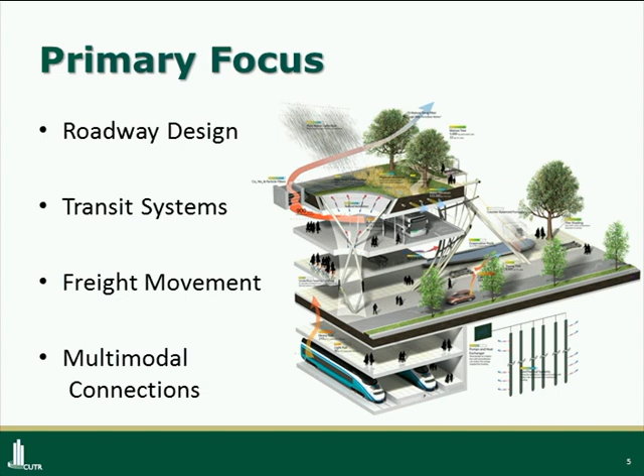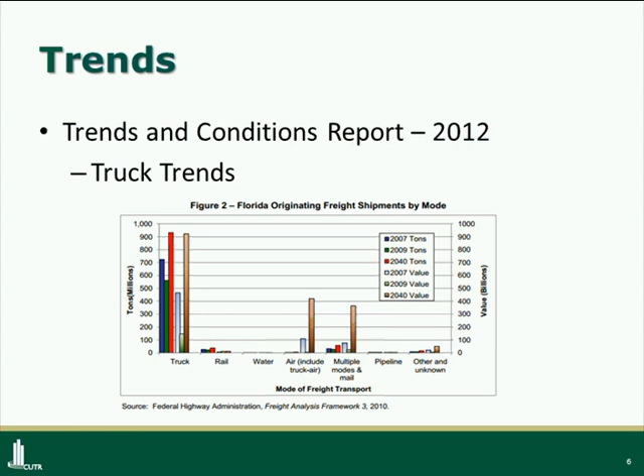Another trend that we considered was the millennial and mobility trends. This trend supports the point that young people are more open to using developing technology. Also, these same young people are more willing to use public transit as opposed to their own personal vehicles. Since these young people will be the majority in the year 2060, or at least one of the top contenders for a generation, it was important to keep them in mind when developing these concepts.

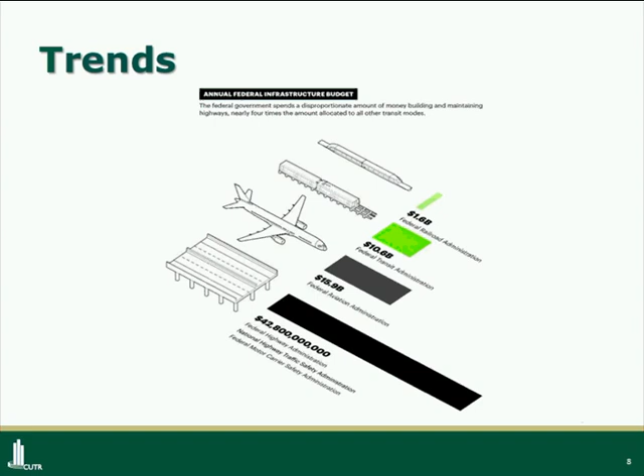To the innovative strategies, we really wanted to include several in our ideas for our vision for 2060. It was important to consider technological advances that will be heavily used in the future. Some of those advances include smart, connected, and autonomous vehicles that will be predominant in the future. I believe IEEE said 75% of vehicles will be autonomous by the year 2040.

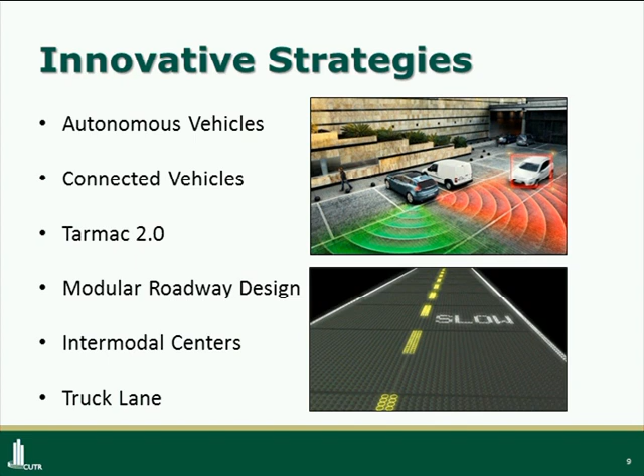Another developing technology we considered was the solar roadway, known as the Tarmac 2.0. We also wanted to implement modular sections that can be placed into the roadway. Another concept was to create easily accessible multimodal centers that will act as a hub to various transportation modes. And finally, we looked at managed lanes, really focusing on a truck lane in particular.

Due to truck trends that I informed you of earlier, we felt it was important to add a truck lane along I-4. This truck lane will really create an ease of flow for trucks, and they will be able to move more freely and get to their destination more quickly, allowing for a more efficient truck movement system. This will help to boost the local economy as well.

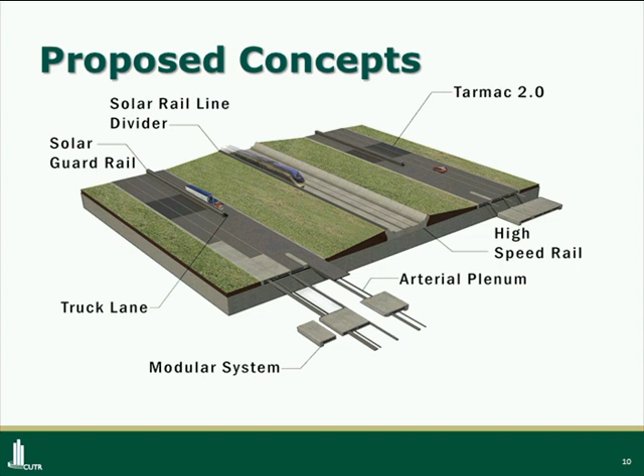You may have noticed the barrier that separated the truck lane from the general use lanes in that previous image. This barrier will be equipped with solar panels throughout their span, just like with the Tarmac 2.0. These solar panels will be able to harvest solar energy that can be used for any of the needs necessary.

With the implementation of modular sections, seen here, you can see that there's now a plenum space underneath where you can put cables or any utility wires that are necessary now or in the future.

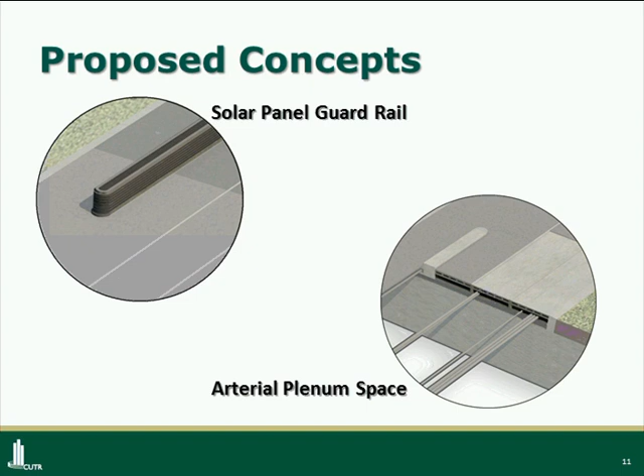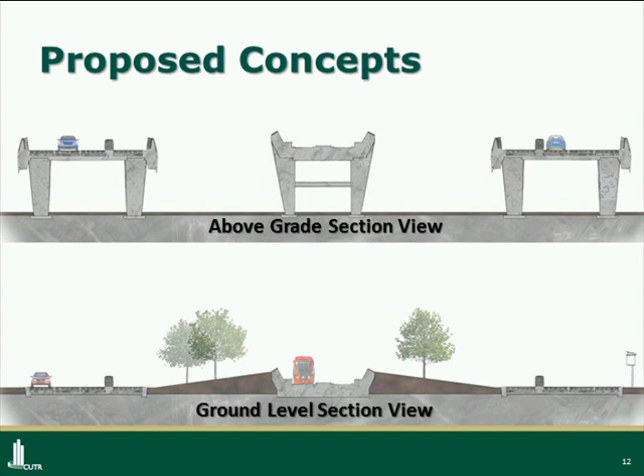The elevated view of the rail shows how it can exit I-4 to reach its destination, the multimodal centers. This rail will act as a connector between three cities, each with a multimodal center: Tampa, Lakeland, and Orlando.

Each station will vary, but all are accommodating and easily accessible by anyone. These multimodal stations were important to add because of recent success in other cities, including a multimodal center in North Carolina that had a heavy increase in revenue for surrounding areas. The use of these stations would really benefit the economy in this region.

Just to briefly mention freight movement once more, we are going to make sure that the Freight Logistics Center in Winter Haven will be able to easily access the truck-only lane on I-4, making it easier for those trucks to quickly reach their destinations.

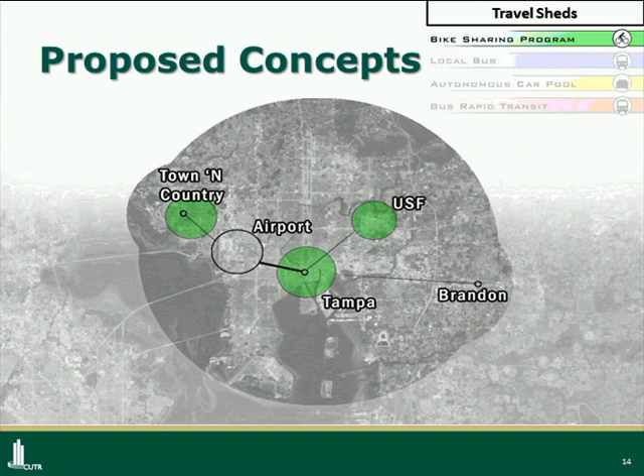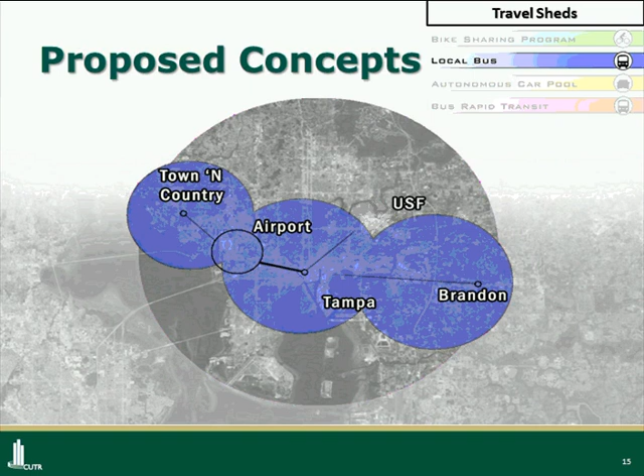We also wanted to keep the existing local bus system in each city, but perhaps increase the amount of routes to give people more options when it comes to using that local bus system.

We also wanted to implement an autonomous carpooling option. This will allow people arriving at the multimodal center in Tampa to use an autonomous car to travel with others to similar areas nearby. This could be really beneficial to anyone commuting to Tampa for work, allowing them to carpool with coworkers and not worry about driving into the city.

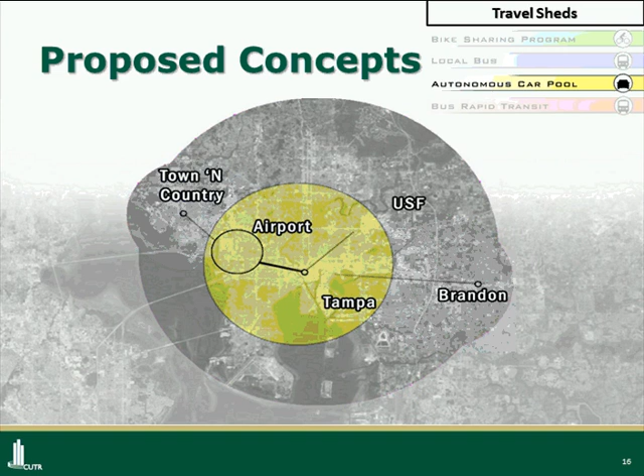It was important to keep the existing BRT system as well, extending throughout each city, once again giving people more options when it comes to using that BRT system, and diverting people away from using their personal vehicles.

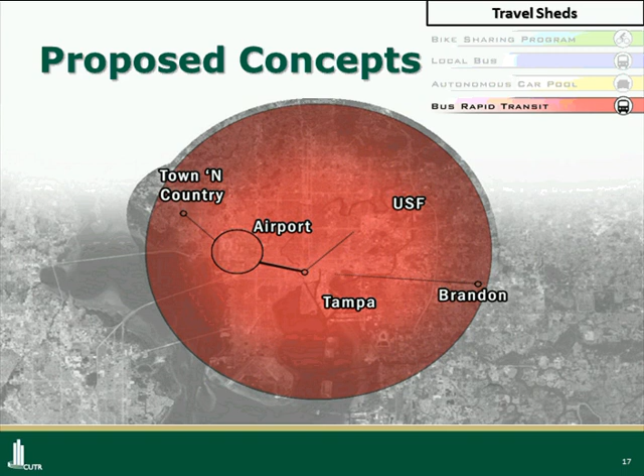And here are the travel sheds of each of those modes just discussed, new and old, in Tampa.

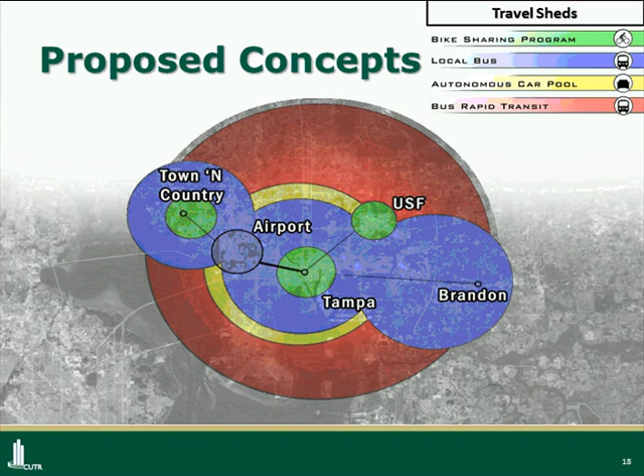Orlando is very similar to Tampa in that we amplified the same existing modes and added the autonomous carpooling option and bike sharing program. Lakeland is much more rural than Tampa and Orlando, so we determined it wasn't necessary to implement bike sharing or autonomous carpooling at this time. However, these can easily be implemented in the future if the demand is there.

With all these modes of transportation available in each city, people will be more drawn to using these modes rather than their personal vehicles. This increase in connectivity with new and existing modes will result in a healthier and greener environment, which is beneficial to everyone in the region.

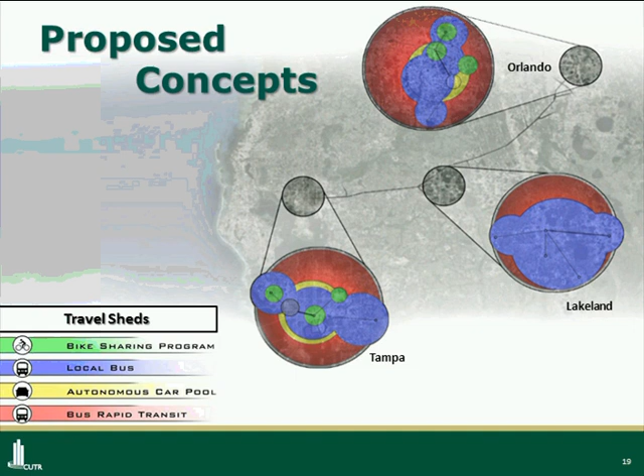So our vision of 2060 is one that shows a corridor that is accommodating, environmentally friendly, easily accessible to anyone that needs to use it, and can be easily expanded throughout the entire state of Florida, leading to an economic boost. With the implementation of these concepts that I've spoken with you about today, we believe this is the corridor of our future. And now I'll pass it to Danny from Team B.

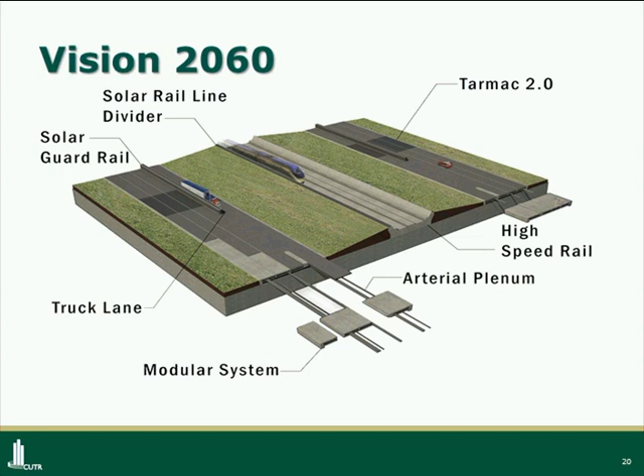Thank you, Casey. Again, my name is Danny Shupp. I'm here to represent Team B, which consisted of myself, Patrick Buddenbrock, Noor Amores, and Jessica Dahamata.

I'm going to go through our vision, moving on to some innovative strategies and technologies we used in these corridors. I'll then introduce the rural, suburban, and urban future corridors we designed. Following that, I'll discuss managed lanes and some more ideas, concluding with additional ideas for 2060 and beyond.

Our vision was to develop an environmentally conscious multimodal design for future rural, suburban, and urban corridors that could be applied throughout the state either as new construction or as a retrofit.

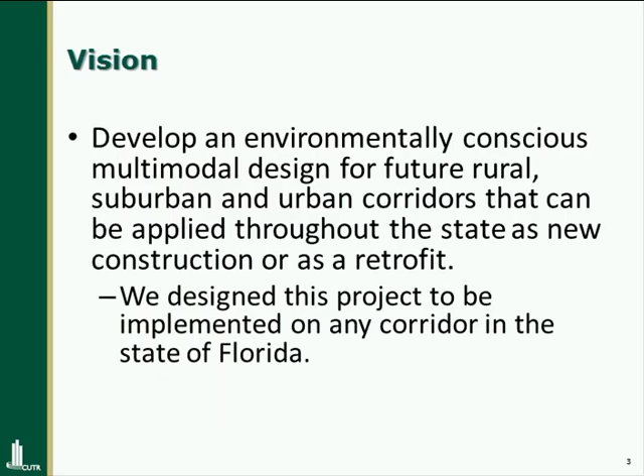We were really focused on trying to develop these designs so that they could be implemented on any of Florida's corridors, either the current ones or the ones we develop here in the future. One of the major concepts we wanted to focus on were complete streets, a huge trend these days. Essentially, a complete street is a roadway designed to accommodate all users.

Another concept we really wanted to focus on was the redesign of intersections, mostly to promote safety for bicycle users. Typically, a bicycle will wait here on the left side of a vehicle in a right-turning situation, whereas the Dutch have redesigned their intersections to keep bicyclists to the right of vehicles at all times. This promotes a safer experience for bicyclists.

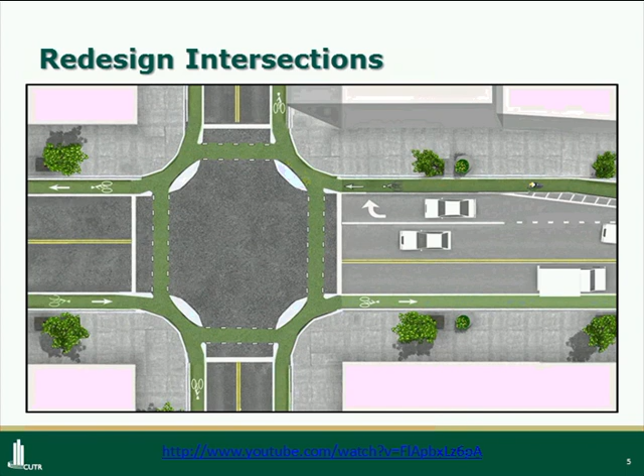They don't have to worry about weaving in and out of traffic, especially at this major point of conflict when a car is trying to turn right and a bicycle is trying to continue straight. You'll also notice there are some curbs here to promote bicycle safety as cars and bicycles are turning at the same time. And believe it or not, these intersections are actually not any wider than a typical intersection we design today.

Rain gardens are another concept we wanted to really focus on in these corridors. These can be really great tools for collecting stormwater runoff, reducing the amount of flooding that can occur. Here in Tampa, we all know that Fowler especially is really bad about flooding. Bayshore is another good example.

Looking at these pictures, rain gardens don't have to be ugly. They don't have to be ditches in the road. We can actually put some really nice plants in here and complement them with the right kinds of soils. They can filter out some of the nutrients that are in this runoff. To take it one step further, we even considered implementing cisterns below the ground that could collect this filtered water so that it can be reused for irrigation.

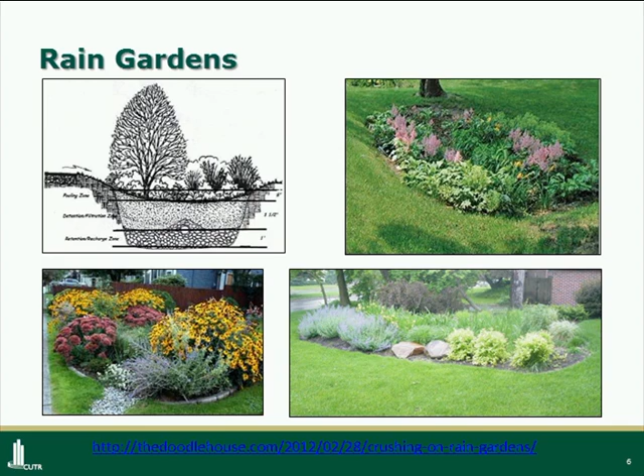Some of the technologies we wanted to include are listed here. We've tried to include as many as we could in the designs. One that I wanted to point out specifically is the piezoelectric lanes. These are roadway lanes that have special generators below the surface that actually collect energy through the vibration of vehicles on the road, and that energy can be stored and implemented in a variety of different ways that I'll discuss in just a second.

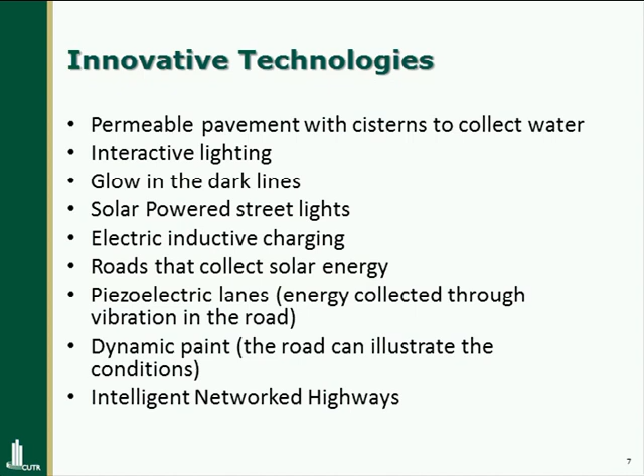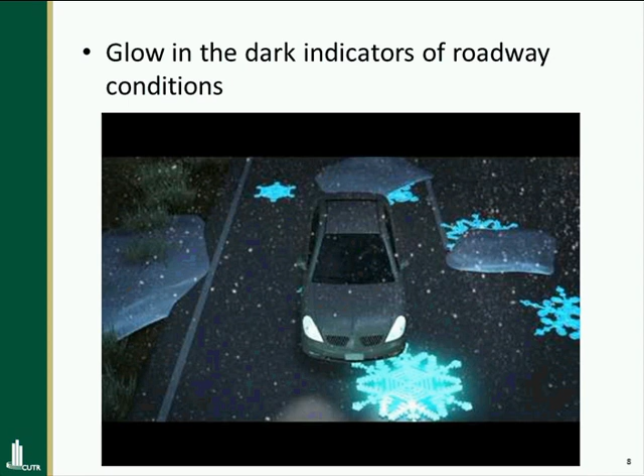Another one of the technologies we used were indicators on the roadways. These indicators actually glow in the dark, and they're activated in certain weather conditions, such as ice on the roads or cold roadways. They'll come up like this. Wet roadways will come up a little differently, just to really improve safety and make drivers more aware of what their surroundings are like.

Interactive roadway lighting is something that we also wanted to include. This is very similar to the Tarmac 2.0 that Casey just discussed. This roadway can actually allow users to know what is happening on their road. Is there something on the road? Is there an accident? Is there an animal? It can also let them know speed limits.

We wanted to include with this type of interactive roadway lighting, street lights that are also interactive. When there are no vehicles present, the street lights wouldn't need to be on. It saves energy. As the vehicles approach, the street lights turn on, and as the vehicle passes, the street lights turn back off. We suggested using piezoelectric generators or solar panels on the street lights to supplement the energy required to use these surfaces.

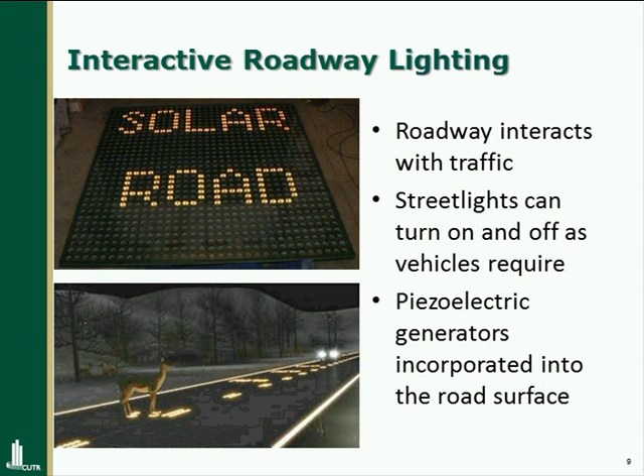Inductive charging is another strategy we really loved. We wanted to put inductive charging plates below the surfaces of the road, and as electric vehicles drove over them, they could be charged without stopping to plug in at any kind of station.

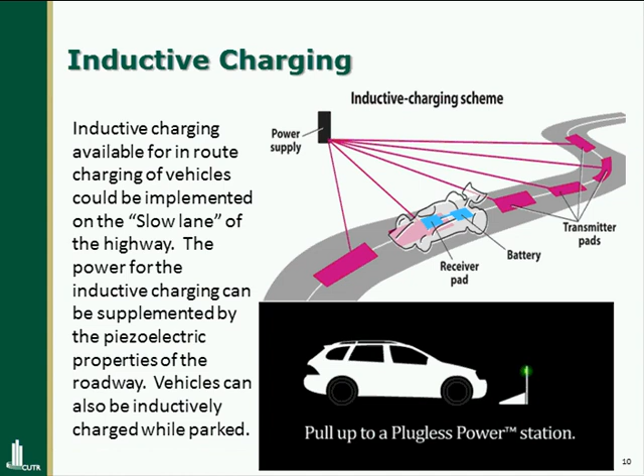This is one of those exciting case studies. Gumi, South Korea has been using an electric bus system. One of their bus routes is actually charged using these inductive charging plates. The plates are under about 5 to 15% of the total route, and they're off until one of the electric buses passes over it, where they then charge the bus throughout its route.

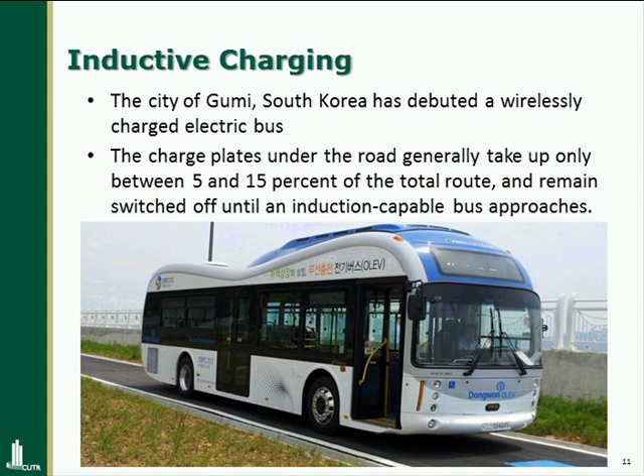And it reduces the amount of batteries required to be carried by these buses. Again, just a very nice, environmentally conscious, environmentally friendly solution that we've included here.

To point out some of the benefits of using these technologies and strategies, we suggested that additional revenue can be generated to offset the cost of constructing the highways with this new advanced technology. An example of that would be users paying a fee to use the inductive charging.

We thought that the inductive charging lanes could be segregated from the highway, and you would need to use an electronic tolling mechanism such as SunPass. You would drive off into the inductive charging lane, drive however many miles necessary, your car would then be charged, and you can exit back onto the regular flow of traffic.

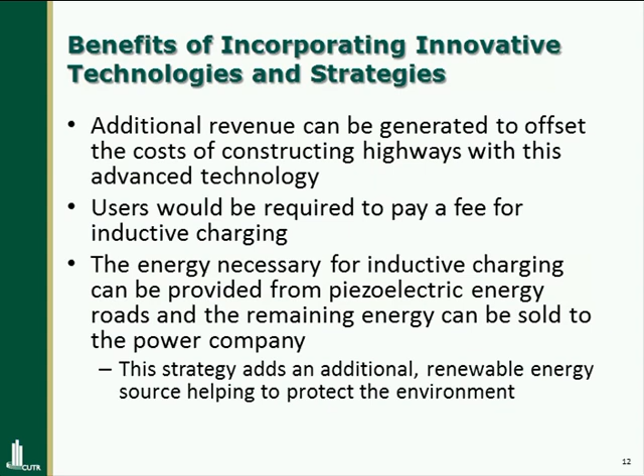The energy necessary for this inductive charging could actually be provided from the piezoelectric generators that are in the road, and any remaining energy could be sold back to the power company. It's an addition of a renewable energy source, really helping to protect the environment, which is something we were very focused on with this project.

Moving on to the suburban concept, you'll notice that same rail system is integrated into the suburban concept, where the people that are actually eating the food can have access to it.

We really wanted to focus on complete streets in these types of areas, a lot of pedestrian and bicycle accommodations. We really wanted to move away from that suburban, sprawling feel, and include some infill housing and infill development with parks and open spaces. And again, you'll see the rain gardens that are included in this corridor as well.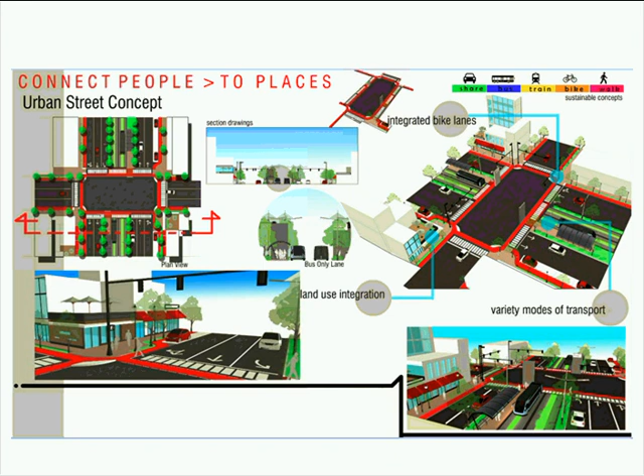We included transit-only lanes in this to help make transit a more favorable option, and really try to give a variety of modes in these situations. We also wanted to promote land use integration to really support a vibrant, walkable urban street concept.

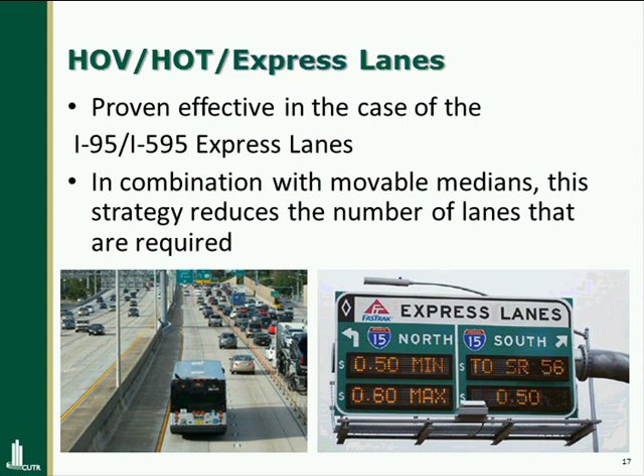I think I-95 and I-595 have really proven to us how effective express lanes can be here in the state of Florida, and we decided, in combination with some movable medians or zipper barriers, this could be a very innovative strategy to use in future corridors.

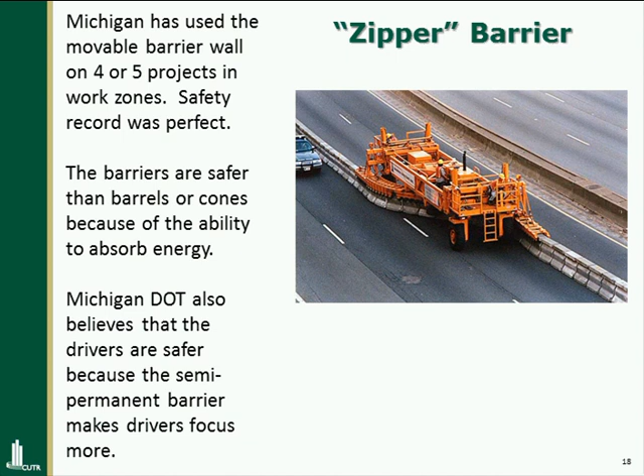The zipper barrier is something that Michigan has been using in other places recently across the U.S. for work zones. They'll use this machine that moves the barriers for work zones, and then it replaces them at the end of the working period. These have been done with a perfect safety record, and are actually suggested to be safer than barrels or cones because of the ability to absorb the energy. People also tend to focus more when there's a more permanent barrier in place like that.

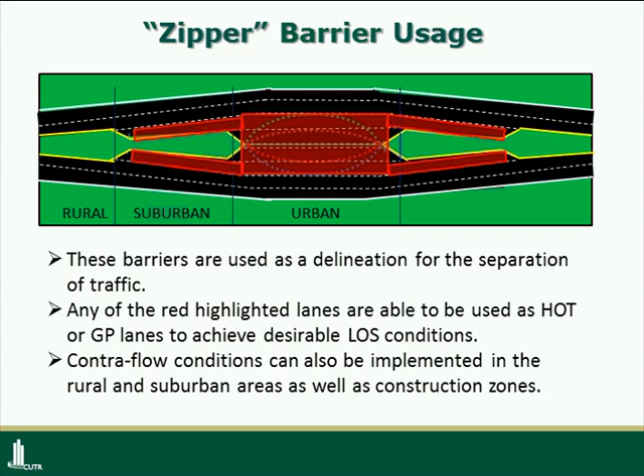This is an illustration of how we may use these barriers. They could be used to delineate the separation of traffic, and you'll notice any of these spaces highlighted in red could be used as HOT lanes or general purpose lanes, depending on the level of service and the peak times of day that we're experiencing.

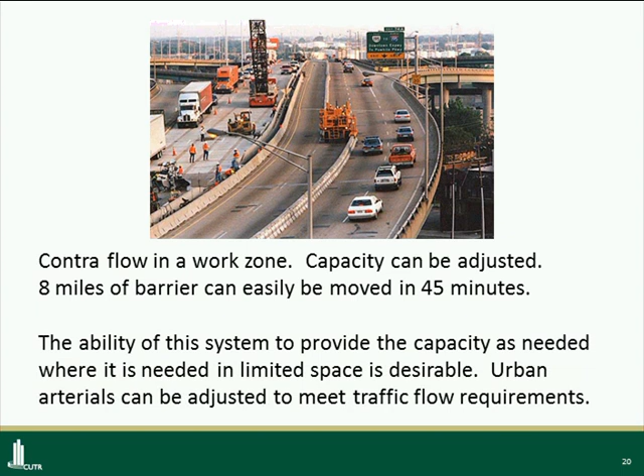Contraflow situations in work zones are another place where these barriers are used. It's noted that about 8 miles of barrier can easily be moved in about 45 minutes, making this a very feasible concept for increasing or decreasing the amount of capacity on one side or another of the road.

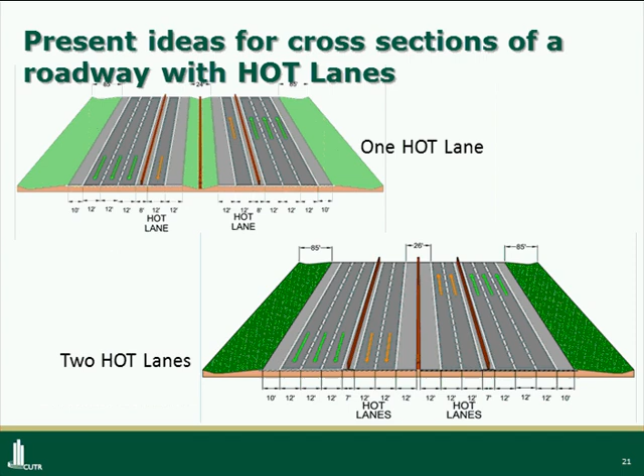Traditionally, we've been dealing with HOT lanes in this type of situation. We'll have 3 general purpose lanes and 1 HOT lane, or 3 general purpose and 2 HOT lanes, which really requires quite a bit of capacity. We've decided with movable barriers we can actually reduce the amount of capacity and get the same effect.

In one situation, the use of the zipper barrier could provide 3 northbound lanes and 2 southbound lanes, and very quickly be changed so that it's 2 northbound and 3 southbound, depending on the time of day and the level of service required. And then these can be converted into HOT and HOV lanes with the addition of more movable barriers.

It would be strange to talk about a future transportation without talking about vehicle-to-vehicle or vehicle-to-infrastructure connected vehicles and automated vehicles. It is clear that this is a trend we're moving towards, and we really wanted to focus on and address these as we move on towards 2060 and beyond.

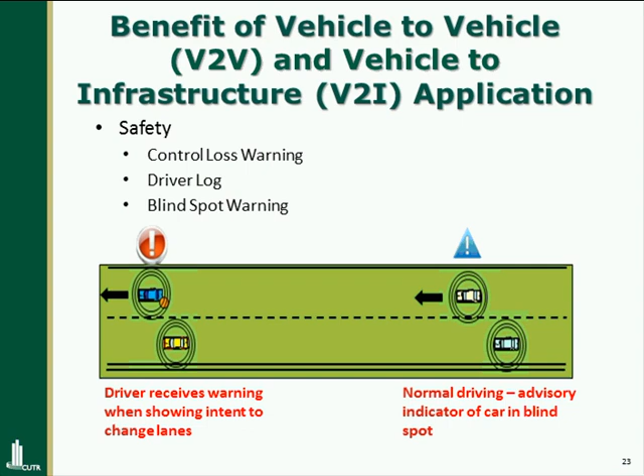The safety of these was what we really liked. The ability of your vehicle to understand its surroundings and possibly even act on those surroundings before you even know what's going on is excellent. We really wanted to try to include some of these concepts.

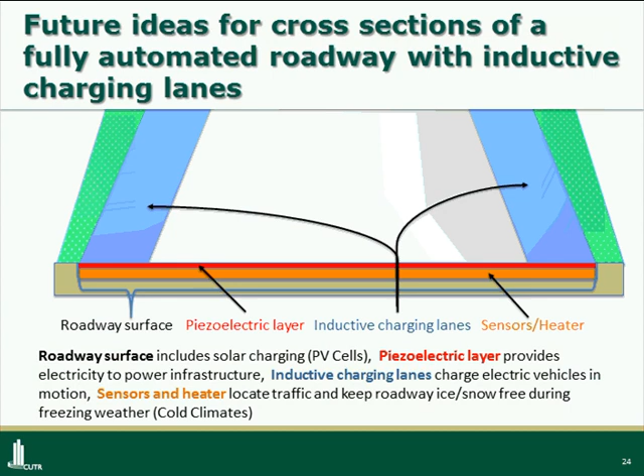So in doing that, we outlined a corridor that would have a roadway surface, and below that a piezoelectric generator. That generator would then be used to power the inductive charging lanes we discussed before. And getting out of the state of Florida a little bit, we wanted to possibly include heaters below the roadway. In situations where there's icy road conditions, we can just use the heaters to clear the roadways, making a much safer situation, mostly for colder climates.

Incorporating automated vehicles, you'll notice that in this design there are no lanes and no road delineation. We've decided that in 2060 and beyond, it's possible for vehicles to communicate with each other and with the infrastructure to get a really good idea of how to align themselves, so that the optimum level of service and optimum speeds can be achieved. The flow of traffic will be very close together, and it'll happen at much higher speeds.

Those are some of our ideas, and with that, I'd like to pass it along to Nikhil for him to present Team C's ideas.

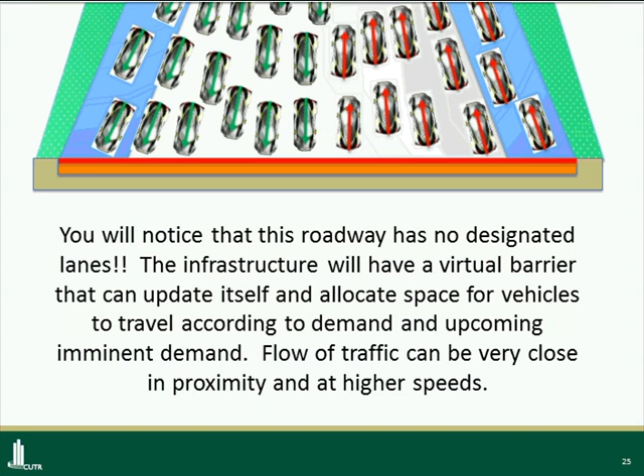Hi, my name is Nikhil, and I will be presenting the ideas we have been developing as part of Team C. Team C, consisting of Josh McDonald, myself, and Eric Pullman, has been working on the Future Corridors project since September, and we would like to go into our design.

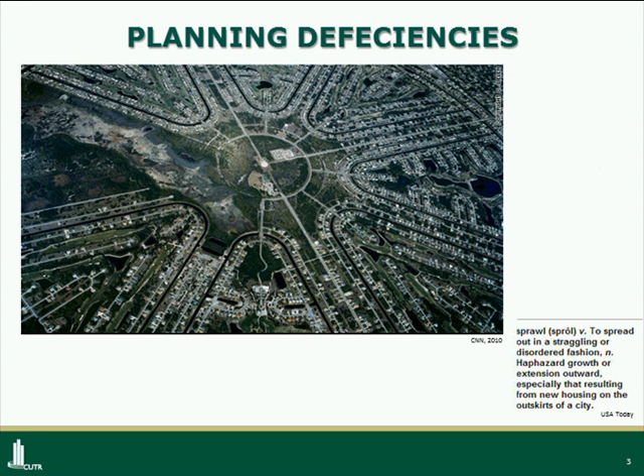But before we go into our design, I would like to focus on the aspect of urban sprawl. This is a photograph taken by a renowned urban photographer and enthusiast named Christoph Gielen. This is coastal Florida, and he's trying to show the effect of sprawl that is virtually unseen for most of us, because these are all aerial photographs taken from a particular height.

Something I want to draw your attention to is the deficiency of planning. As you can see, this area has 2 houses which share a boundary wall, and the time taken to drive between those 2 houses is 20 minutes and 9.3 miles.

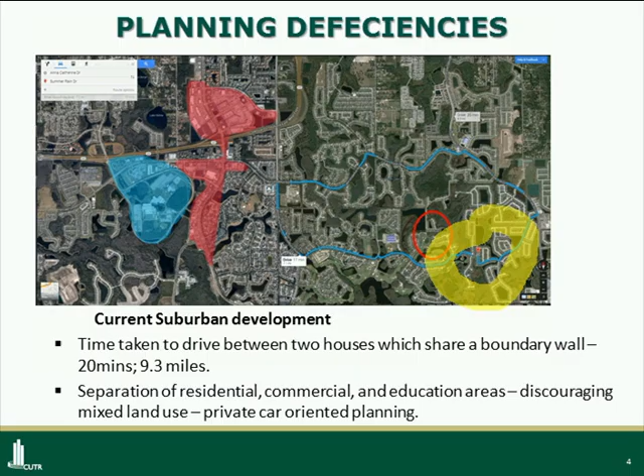This is again in the state of Florida, where we've seen this trend of separating residential, commercial, and educational areas, which discourages mixed land use and makes the private car more of a prosthetic device than an independent choice of the user. This is something we would like to address in our corridors when we present our vision.

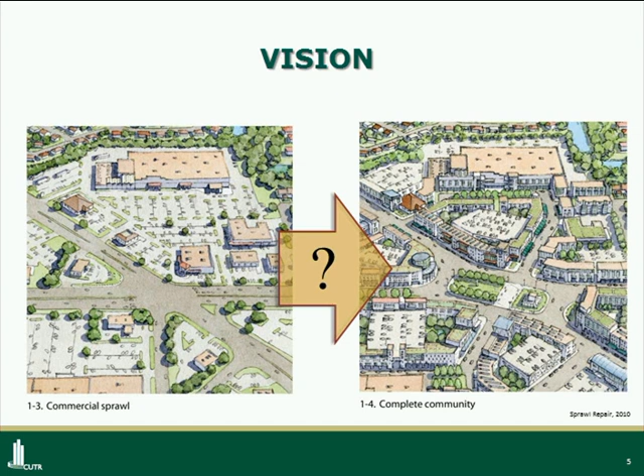So our vision primarily involves changing from this element of commercial sprawl into building more complete communities, and the presentation will go on to explain how we go about doing this.

So we start by proposing modal alternatives to the future corridor. We believe that people should have a duality in mode choices, with different modes of transportation for the seamless movement of people.

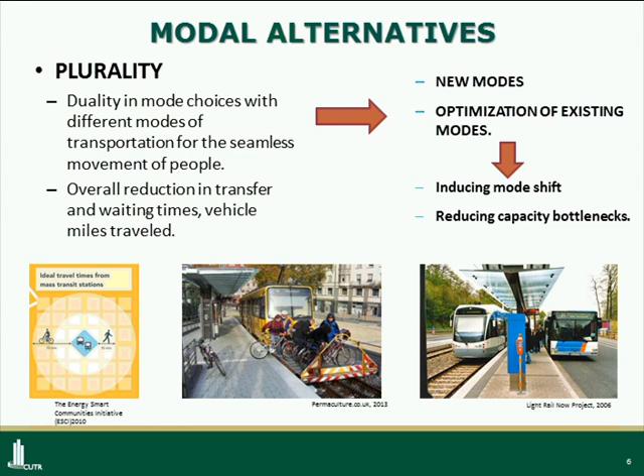We believe that we need an overall reduction in transfer and waiting times and also in the vehicle miles traveled. How do we achieve this? We achieve this by two points: one, by having new modes, and second, by optimizing the existing modes that we have. This is aimed at inducing mode shift, and it's also aimed at reducing capacity bottlenecks.

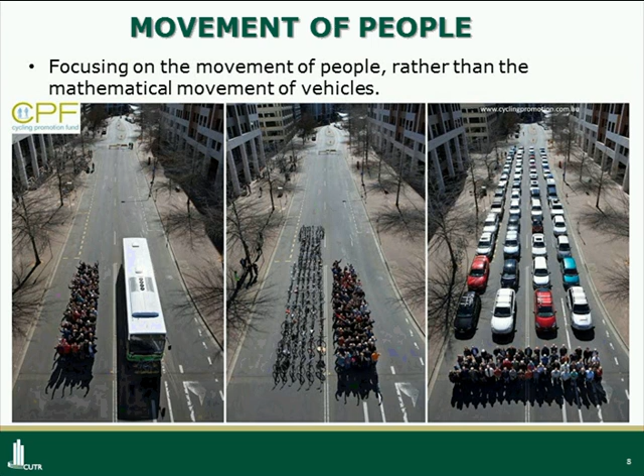The second thing that we want to focus on here is the movement of people. We believe that we have to respect the autonomy of the individual, but then we have to also ensure that we ease the flow of the masses. So again, coming to the same point where I focus on the movement of people rather than the mathematical movement of vehicles. The picture below is very self-explanatory on what mass movement can do to a roadway condition that you see in this photograph.

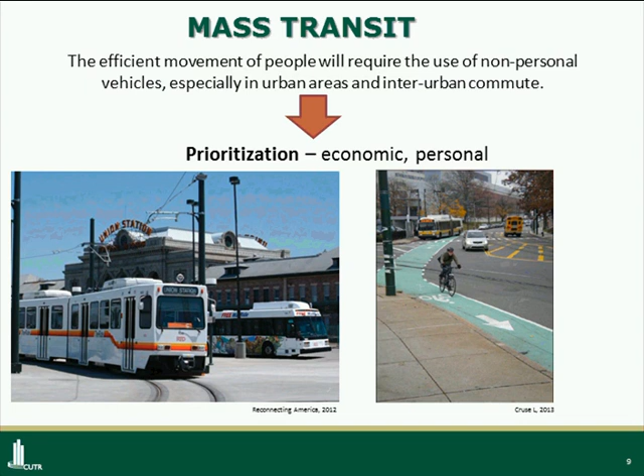Next, the focus that we want to do on the future corridor is on mass transit. For the efficient movement of people will require the use of non-personal vehicles, especially in urban areas and for inter-urban commute. This has to be seen as an economic and personal priority in the days to come, because we have been witnessing a lot of increasing trends in car ownership for the urban areas, and we feel that it will come to a stage where we are going to have to think about these measures. So the next section that I'm going to emphasize is on the innovations that we propose to do, starting with the aspect of new modes.

The first mode that we propose to introduce is an express train service along the interstate corridors for the state of Florida: passenger rail transport operating between the extents of the future transportation corridor. An operating speed range could range between 40 to 80 miles per hour.

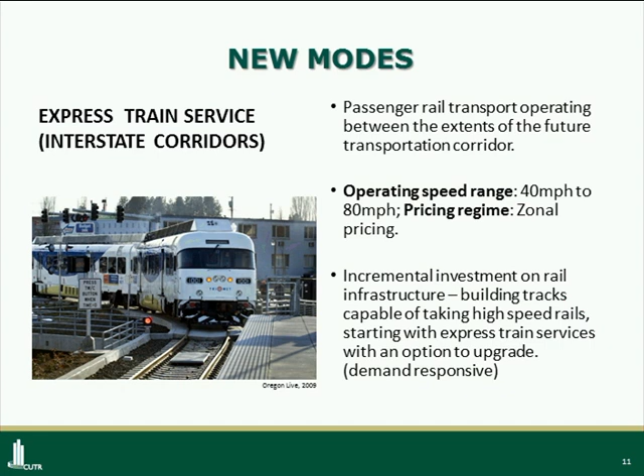We believe that we need to do something called an incremental investment on rail infrastructure, which basically means that we build tracks which are capable of taking high-speed rails, but we start with express train services with the option of doing an upgrade based on demand, so that we don't waste a lot of money by investing in high speed just before we see the demand. So that is more of an incremental investment on infrastructure.

The second mode that I propose here is the bus rapid transit system, which we intend to apply along the state highway corridors. The bus rapid transit systems will operate as the connectors between the suburban and the urban, and also along the internal urban routes.

We are proposing an operating speed of 35 to 45 miles per hour, and zonal pricing. Here we are doing an immediate investment in fleet with minimal investment on infrastructure, because most of the infrastructure that a bus rapid transit system needs costs very little compared to the fleet that we are going to invest in. Bus rapid transits can operate on existing roads with updated stations serving population centers.

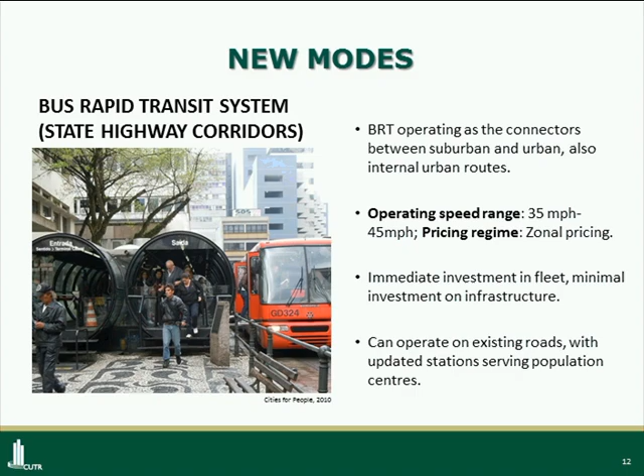Next, we come to the aspect of optimizing our existing modes, where we feel that planning for transportation has to be done in relation to the demand anticipated. That is, we envision a transportation system which is dynamic with respect to day, time and economic activity, and planning based on cultural events by extracting information from web sources and GPS data monitoring to study dynamism in demand.

We also propose an optimal scheduling based on the schedules of the new mode, whereby what we achieve is an integration of sorts, where we try to reduce the travel and transfer times.

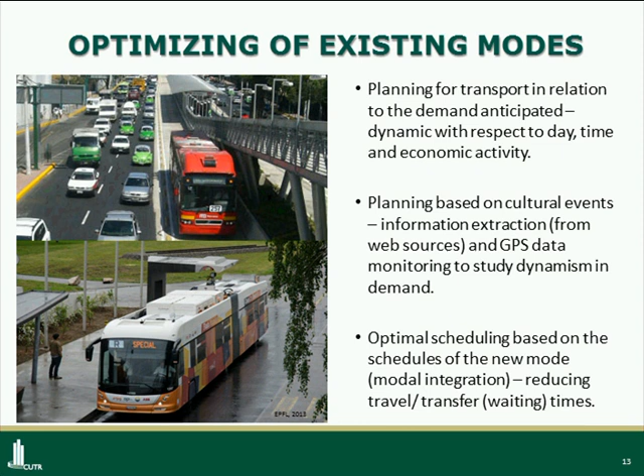So what are the key trends influencing this design? The major trend influencing this design is the fact that we are looking at an uncertain future. We are unable to exactly predict what is going to happen with how we move or how our mobility patterns are going to change. So we are looking at an uncertain future, and the planning will involve a very conservative approach at this point in time. We would like to quote the study done by the American Public Transportation Association, who have through their research found that fewer millennials look to cars for mobility.

If you can see below, you have the five modes. There was a survey conducted by the American Public Transportation Association, which asked the millennials to rate the five modes on a scale of five. As you can see, the bus system receives a 4.34 on a scale of 5, whereas the car receives the lowest at 2.24 on a scale of 5.

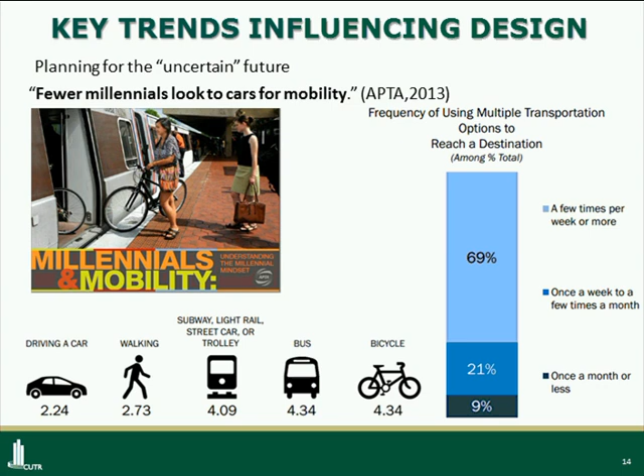Another key trend that has influenced our design is last mile connectivity, with lesser travel and transfer times. There were questions on the APTA report of 2013, which interviewed millennials asking what they would like to see in their transportation options, focusing on more reliability, real-time updates, user-friendly interfaces, Wi-Fi, 3G, and so on.

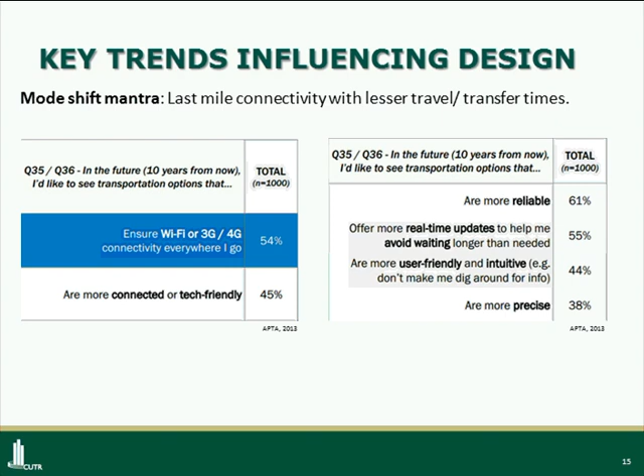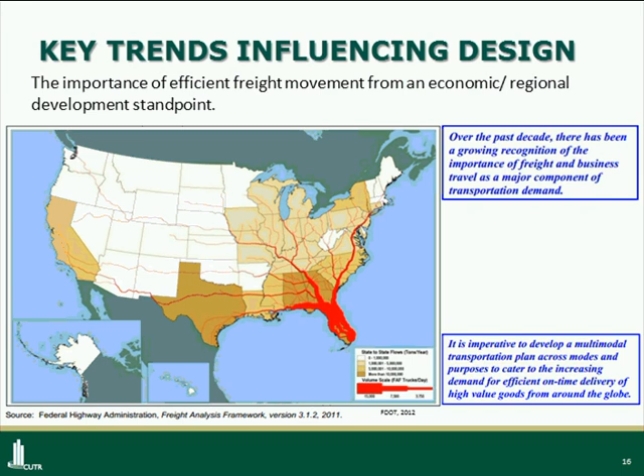Another major trend influencing our design is the importance of efficient freight movement from an economic and regional standpoint. This is the state of Florida, showing the freight flows occurring from Florida to the rest of the country, which have grown significantly. There's been a growing recognition of the importance of freight and business travel in transportation demand, and this will be one of the major trends influencing our design, which I'll discuss in the coming slides.

We are trying to shift from the predict-and-provide model to the predict-and-prevent model, where we try to accurately predict what is going to happen, even though forecasts are usually very difficult to make. What we are trying to do is reach a stage where we don't have to go back and do a lot of repair work on our investments.

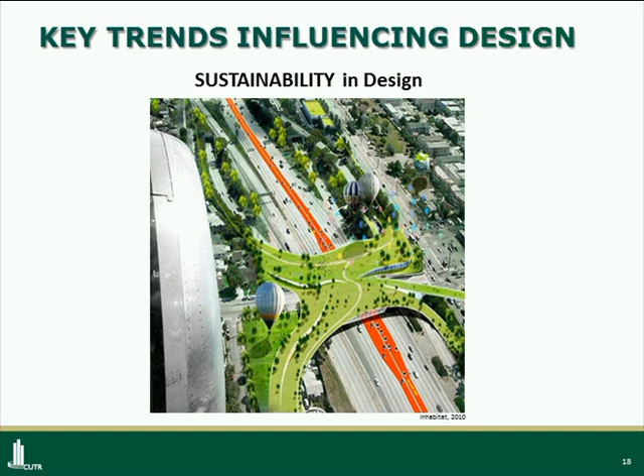Another key trend that influences design is sustainability, which has a lot of focus in the modern day. Now we come to the last part of the presentation, where I try to envision the future corridor that we are going to present before you.

For the proposed concepts, we have divided all the roads in the state of Florida into three broad categories: the first is urban arterial, the second is state highway suburban, and the third is interstate. As you can see, this is the current scenario in an urban arterial, a very typical one drawn from the state of Florida.

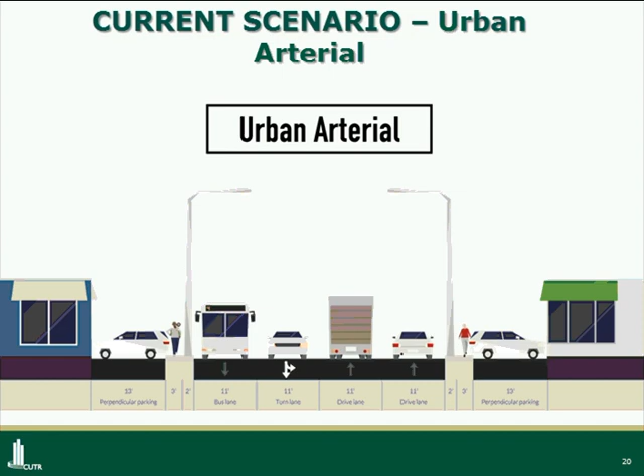These have been generated through Streetmix. As you can see, you have turn lanes, drive lanes, and perpendicular parking on either side. This is the current scenario for a typical urban arterial.

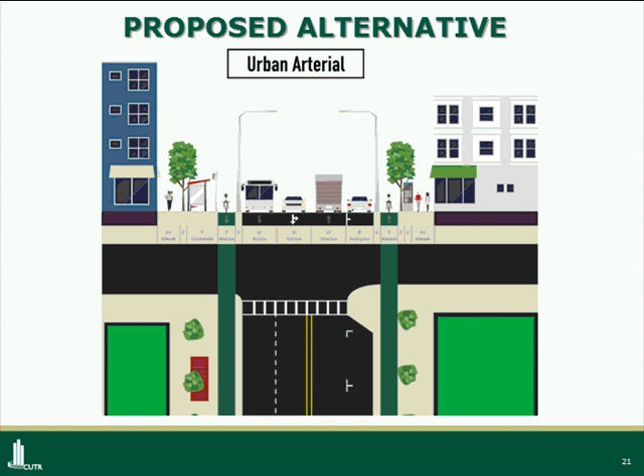This is a proposed alternative, shown in plan and section view, which I'll go into in more detail in this slide. We have taken off the perpendicular parking to the side streets, included a bike lane on either side, and proposed to reduce the number of lanes on the main road from 4 to 3.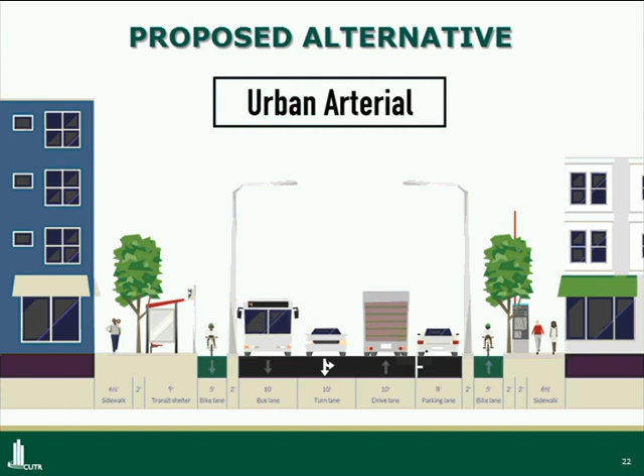In doing so, we intend to encourage a mode shift, expecting the number of people using private modes to decrease inside urban arterials.

Next, we show the differences from the current corridor conditions. This is a typical urban arterial where we're showing what differences would come along in our new design compared to the current design.

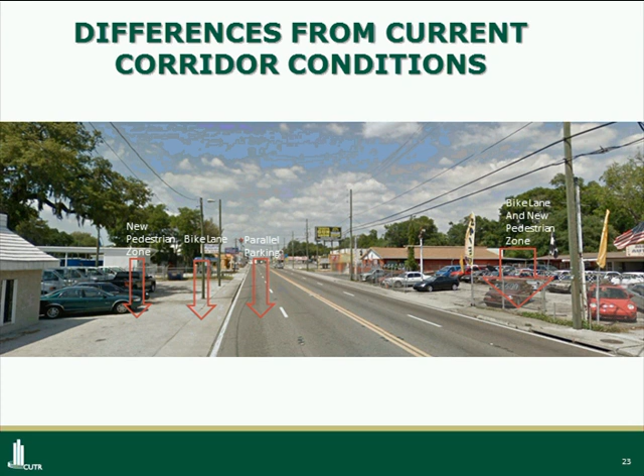Next, we go on to the state highway suburban section, where we again show a very typical example. We have turning lanes and driving lanes, as well as perpendicular parking with sidewalks on either side.

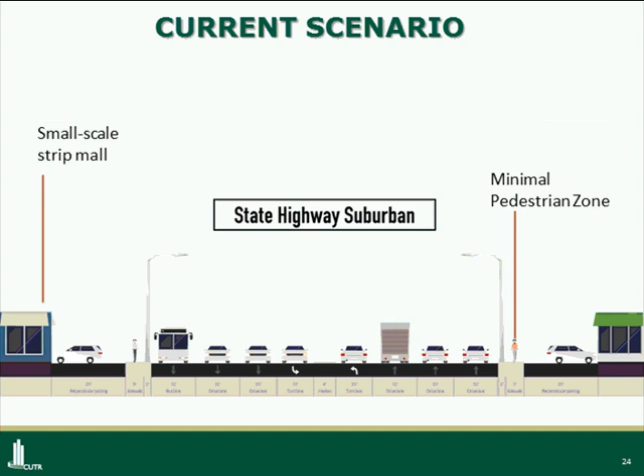What we propose for the state highway suburban section is the introduction of a bus rapid transit system, which would take one lane on both sides, while keeping the drive lanes and turn lanes as they were before.

One thing we've taken off is the perpendicular parking again, which we feel could be moved to an off-street level. We have sidewalks and shelters for transit, as you can see, and this would be a typical proposed alternative for a state highway suburban section.

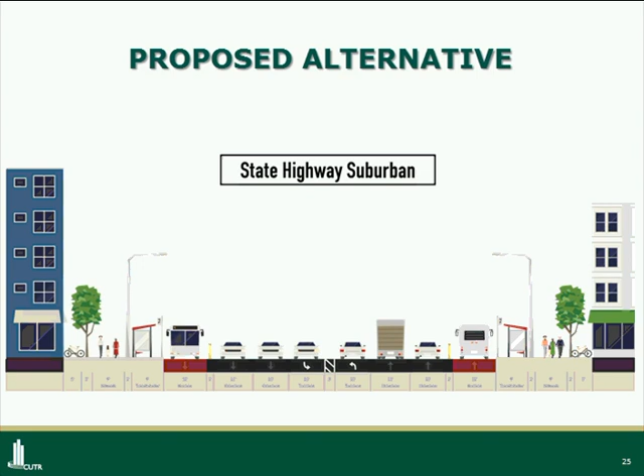This is the state highway suburban section in more detail, if you're interested in seeing greater detail. As you can see, there is a 2-foot separation between the BRT lane and the normal drive lanes.

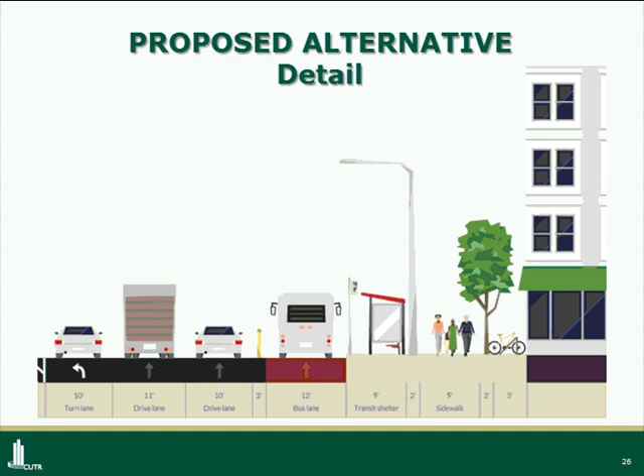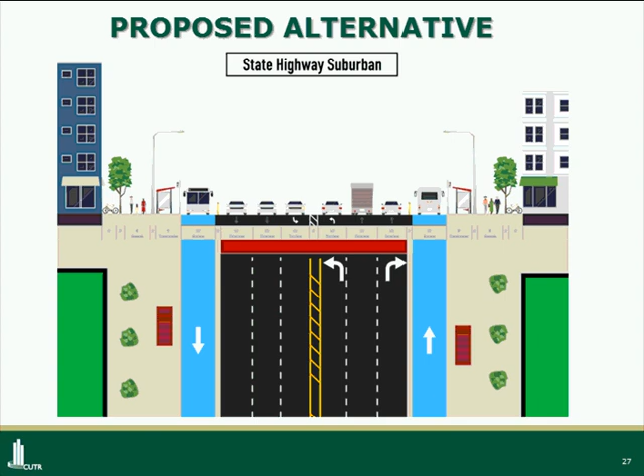This is again a proposed plan and section view of the same section, to give an overall idea of how this will look. You have the bus rapid transit lanes in blue here, and the other turning and drive lanes.

This again shows the difference from the current corridor conditions. You will have the bus lane over this, and the drive lanes here. You have a drive lane here, and the normal turn lanes here.

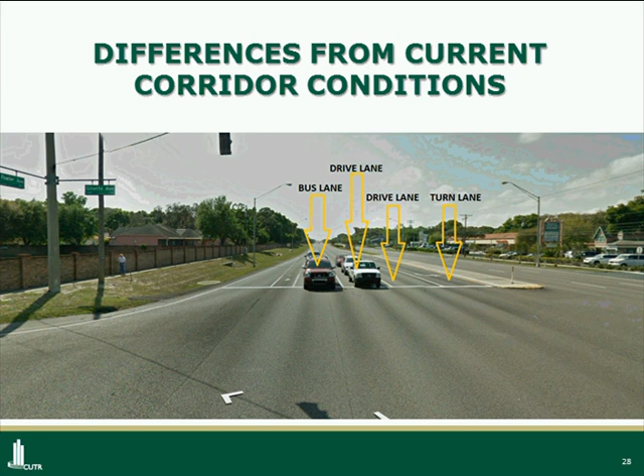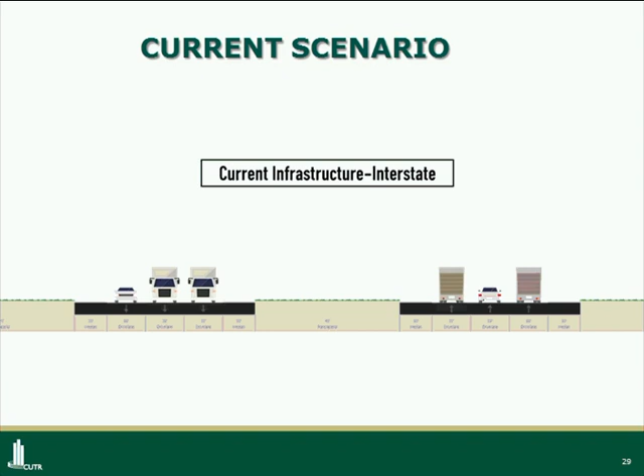So this is where we intend to bring our light rail into the picture. The express rail would be running between the medians of all the interstate corridors. You'll have a typical station design, which is very basic for the sake of presentation.

Something I'd like to stress here is the existence of the autonomous freight lane. We envision autonomous trucks would be the first kind of automation we'll see in the future, largely because of the excessive truck traffic the state witnesses, and because the trucking industry can bring automation at a large scale in a very easy manner.

So we envision an autonomous freight lane in our interstate corridors, which would be separated from the other drive lanes as well. This is something we feel is going to have a lot of significance over the coming years.

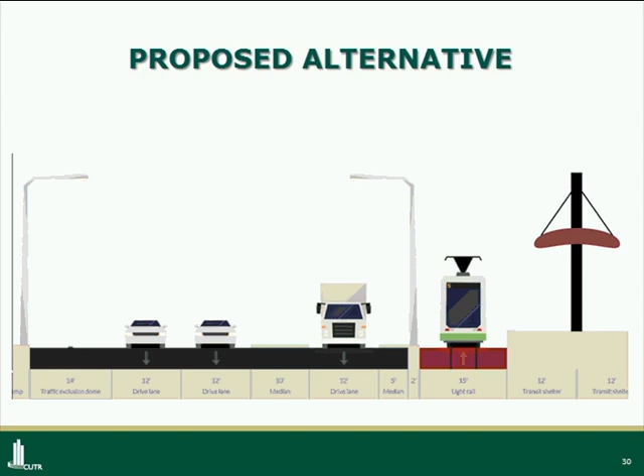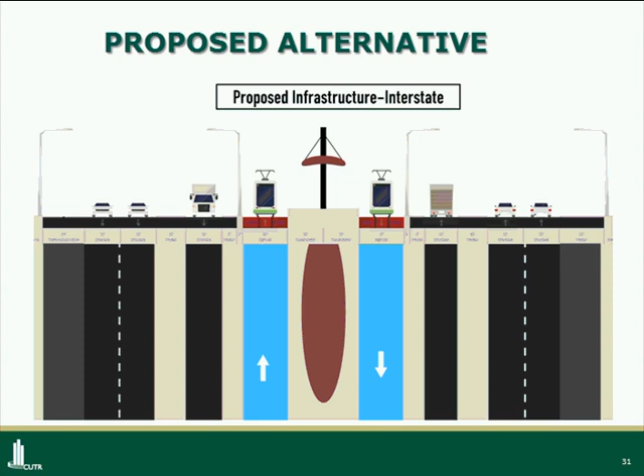So this is again a plan and section view of the proposed alternative of the interstate that we have designed. You can see the blues are the express rail corridors. The first lane here is the autonomous truck lane, and you have the normal driving lanes on either side.

I would like to conclude by presenting the final slide on the differences between the current corridor conditions as we have shown. You'll have the express rail coming over the medians, a dedicated truck lane, a median between the dedicated truck lane and normal traffic, and drive lanes on either side. So this is our corridor concept for Team C, and I would now like to leave the floor open for questions.